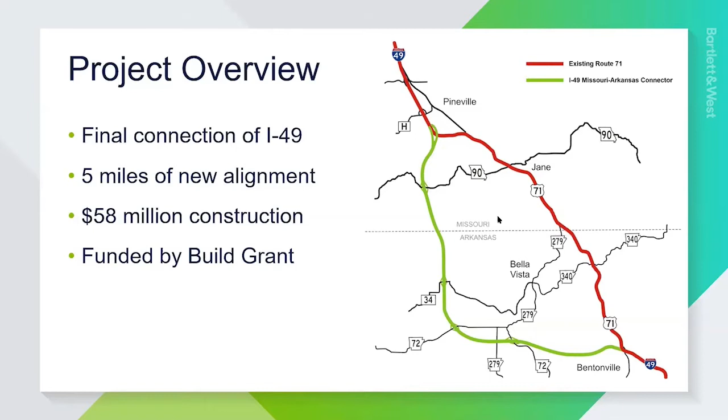So there were some key aspects of the project that made it ripe for some innovation, and is where some of this alternative technical concept came from that we'll be spending a lot of time talking about today. One of the reasons that was really able to have some innovation is this was an extremely heavy earthwork job. It had just an extreme amount of earthwork. It's through the Ozark Mountains. There's a reason this road probably wasn't originally built here. It is rugged terrain that is just difficult to construct.

So in the 5 mile section, it had 5 million cubic yards of earthwork. I mean, it was just a tremendous amount. 100-foot plus cuts and fills. You were going through a 100-foot cut and immediately the mountain dropped off and you hit the 100-foot fill. So it was just an extreme terrain that was difficult to build in.

In addition to trying to make that an efficient process, it also created very large drainage structures. You can imagine if you're in a 100-foot fill and in this valley you have water flowing through it, you have very long, large box culverts, and anything we could do to shorten up a box culvert or change a box culvert had very big impacts very quickly because they're such large structures.

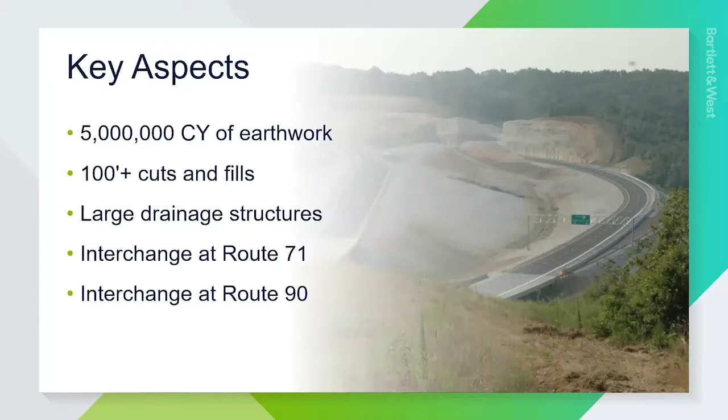And then it also had 2 interchanges that became a lot of the focus of the project design. One at Route 71, which is that north connection where it splits off, so that was more of a directional interchange. And then it had a standard diamond interchange at Route 90. Both of those items were big cost items that allowed some potential innovation.

So the participants in the project: the owner is MoDOT. It was a MoDOT-run project. The contractor is Emery Sapp & Sons. And then Bartlett and West, we're working directly with the contractor through the ATC process that we'll talk more about here very quickly, and then designing the project itself, the changes that were made.

So with that, I'm going to stop sharing my screen. We do have a few slides that we'll bring up during some of the different questions. I do have prepared questions today that we'll start with, but then we'll try and work in the audience questions as we can, as they make sense. But I wanted to introduce the panelists today from those three entities. Craig, you want to kick us off and tell us who you are and what your role on the project is.

Sure, thank you, Todd. My name is Craig Switzer, and I'm a project manager with the Missouri Department of Transportation, Southwest District. I've been with MoDOT about 22 years. I'm based out of Joplin. I handle projects in Barton, Jasper, Newton, and McDonald counties, this project being the most prominent one right now.

And my role on the project was scope, schedule, and budget. And my role was to oversee the design of the project and to lead the ATC process from the owner's end.

And so this put us in a situation where it was a perfect opportunity to engage some of our industry partners. And by industry partners, I mean contractors and design consultants to assist us in this redesign effort. And under these circumstances, ATCs offered the best opportunity to do that. It offered cost savings for us, and it offered the opportunity for contractors to pursue ATCs, to get a lower bid, and to potentially win the job that way. And so that's how we came about using ATCs for this project.

Thanks, Craig. Definitely a complex process, but I appreciate you trying to put that in a quick summary for us. I guess we'll stick with Craig for a minute, and I know you have another slide for this one. Can you compare and contrast the ATC process with other forms of innovative contracting that MoDOT uses, design-build, and other types of things that you tend to use?

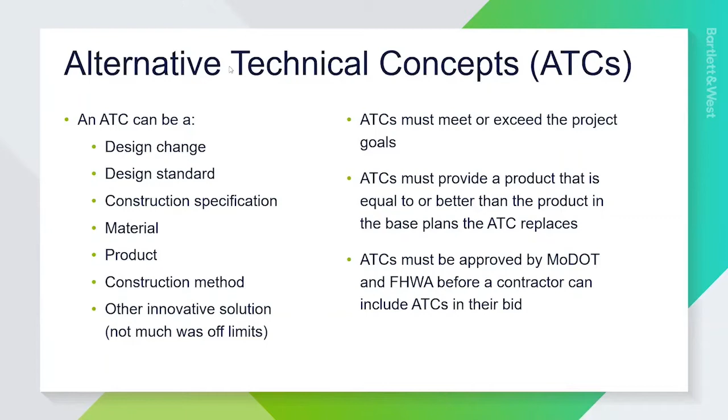Yeah, sure. If you go to my next slide, and this is straight out of MoDOT Engineering Policy Guide 147, if you'd like a further read on any of these options. But you see on the left there the three innovative contracting options we have for contract time. And these weren't really a good fit for this project. We already knew Arkansas's completion date. I think they'd awarded their last set of projects somewhere around July. And we were awarding in early January of the next year. So we already knew about when their completion date was going to be.

And so for us, it didn't really make sense trying to get the contract done early. If the Arkansas side wasn't done, then we weren't going to be able to open the road anyway. And the schedule was aggressive as it is, so we didn't really see any sense in spending extra money to try to get our side done early.

Those you see on the upper right-hand side, the alternate design requirements, which ATC is one of those. The alternate and optional pavement bidding, our project also has this. It allows contractors to bid either an asphalt or a concrete pavement option. And the add alternates at the bottom. We typically use that when additional items of work may be awarded if the bid comes in within budget, but those additional items are optional. And we didn't really have any optional items we could break out of this project and award as an add alternate. So that again just didn't really make sense with the specific situation we had in this project.

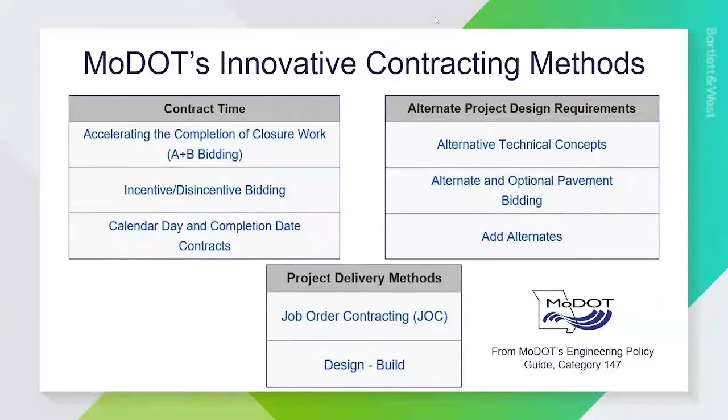As we looked at the job, with earthwork being the most significant item on the project, we looked at ways to optimize MoDOT's base design related to the earthwork. The job was designed originally as a pretty much balanced project, and we further evaluated that on ways to reduce cut and fill to keep it somewhat of a balanced project, but also reduce overall quantity.

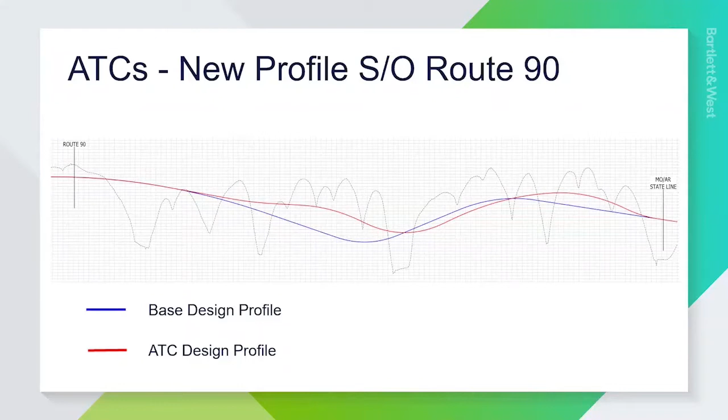So as you can see here, this is probably the most significant change. This is only the southern half of the project itself, really from the Route 90 interchange to the state line. This profile adjustment here really significantly reduced the earthwork in that area. And as Todd mentioned, it also allowed some incidental savings on items such as drainage structures, where we were able to reduce lengths of boxes and pipes, et cetera. So that's the first one from a high level perspective.

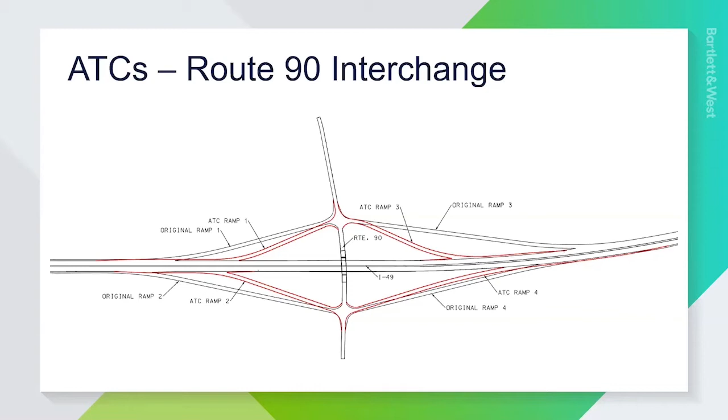It also modified some of the earthwork, but a hidden gem in this one was it also allowed us to stay out of one of the major creeks running along the project that MoDOT had to get Corps permitting for. So there was a lot of attraction to this one as well. I don't think we really got to recognize all the hidden benefits there, but everybody was excited to stay away from any of the creeks and minimize Corps impacts.

So those are the major items that contributed to our ATC, and early on we looked at these, and it took a lot of time in evaluating these to prove that they're going to be worthwhile, but we had a lot of open conversations with our team, Bartlett & West and MoDOT, to ensure that everybody was going down the right path on something that could be approved.

Josh, do you have any kind of impact, I know they all blended together. So do you have a total value of how much you think MoDOT saved on that? I think through our total submittal process with all the ATCs, we anticipated saving about $7 million. And your total bid was 58, right? Correct. So I guess rough math, a little over 10% savings there. Yes.

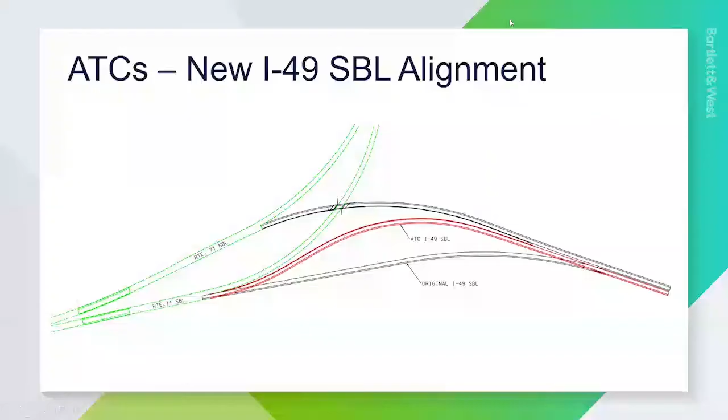We also redesigned the Route 90 interchange bridge, changing it from a 2-span bridge to a single span bridge. In doing that, we brought it up to current design standards since it was designed years ago. That resulted in savings, and it also decreased the construction duration for that bridge and our impact to Route 90 itself, which is closed during the duration of construction.

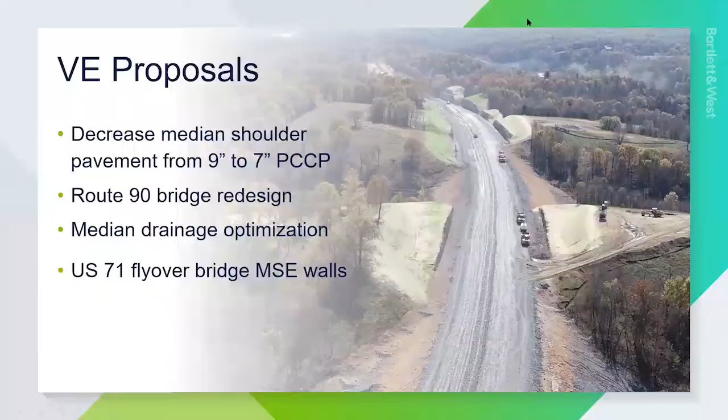Thanks, Daniel. To your point at the end, it seems like the innovation kept going a lot because of already being involved and being under that mode of looking at those plans and trying to figure out what you can improve on every day.